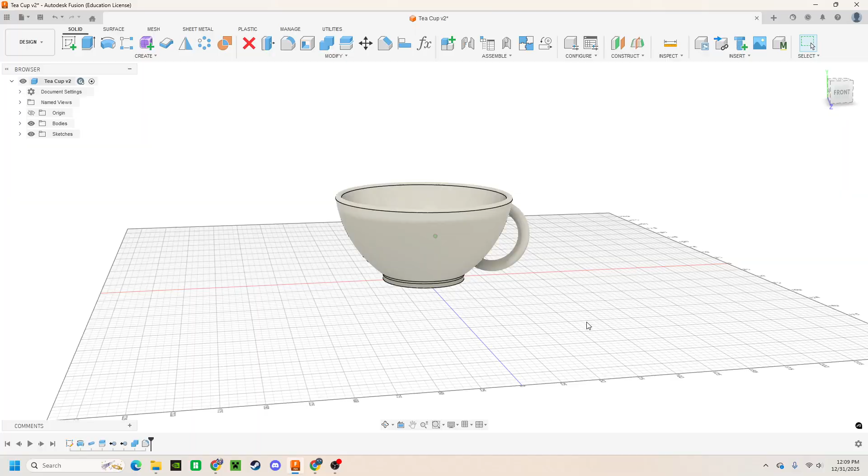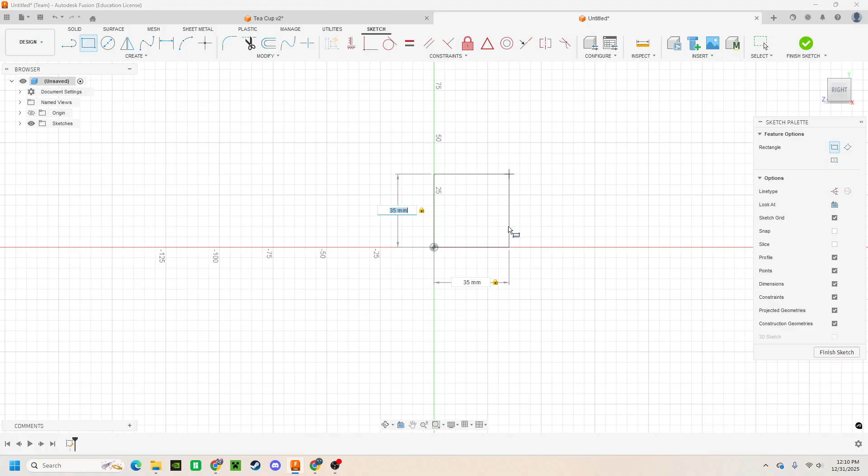Create a sketch on the side plane. Create a rectangle starting off at the origin that goes right 35 millimeters, and then the length or the height 5 millimeters.

From here, we're going to make two construction lines, one vertical from the origin that is 75 millimeters, and then from the top of this point, one horizontal that is 75 millimeters.

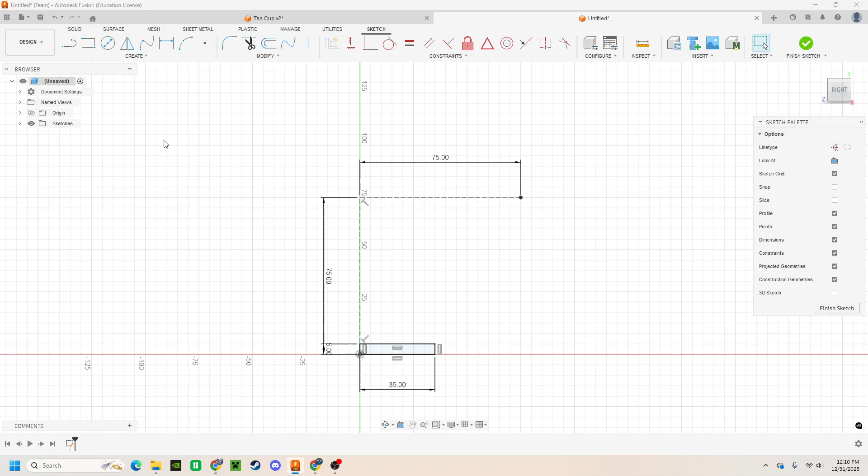Now, turn off the construction line. We are going to make an arc, so go to the Create tab, 3-point arc. Select this top right portion of this rectangle, and then this point on this construction line we just made, and then just press it. Now we're going to constrain this to be 100 millimeters.

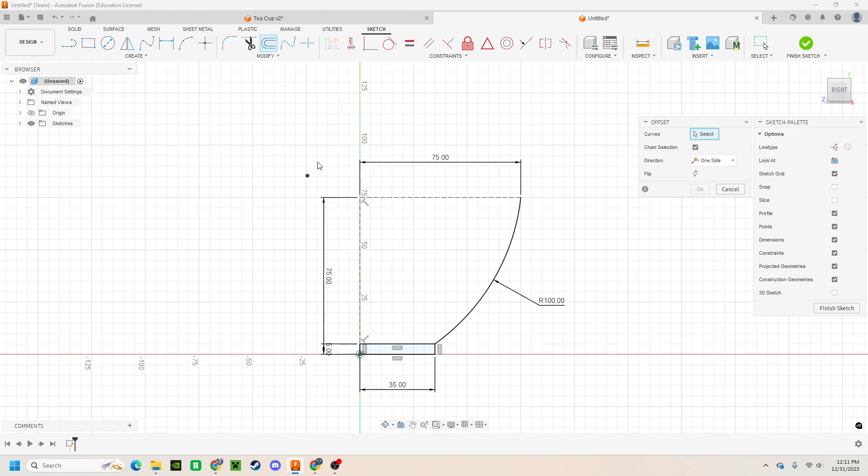So now we have this almost like teacup shape, but we of course need to have the inside. So we're going to use the offset tool. You're going to offset it inwards 5 millimeters.

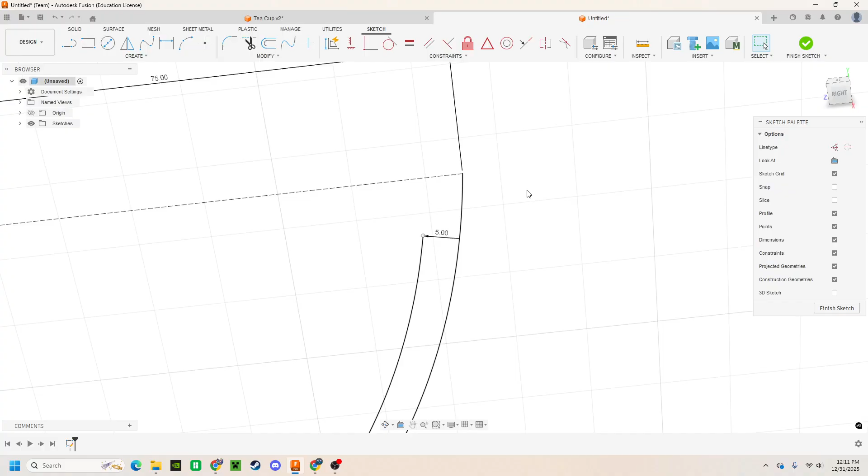Now, whenever you make an offset, the endpoints always get unassigned. So like where we can see this outer arc, the endpoint is assigned to this line. The offset that we make inside is not. So what you'll have to do is you'll have to drag it up to there, and then it will snap. And then do that to the bottom one as well. If it doesn't snap like this, it's not snapping to it.

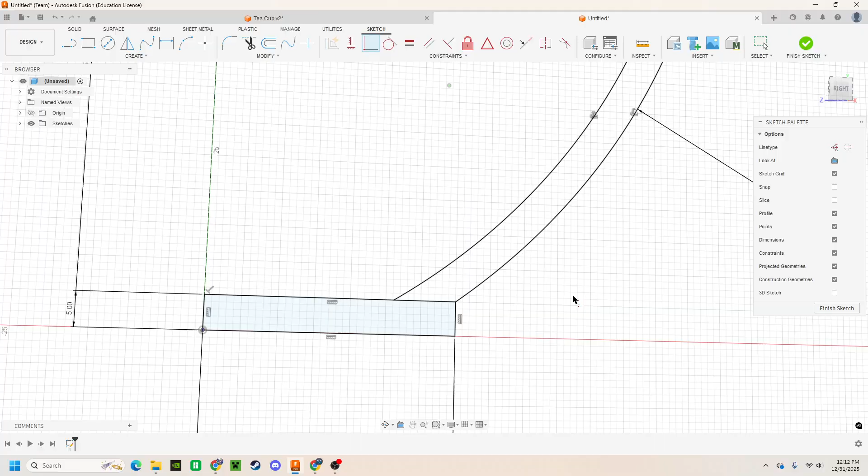You can go to the Constraints tab and press Coincident. Tap on this endpoint and then tap on the line. We're going to go into constraints later, but that's just a quick way to do this.

Now, because this top line up here is a construction line, this actually isn't a profile. So this part of the teacup that we made, it's not selectable like this bottom rectangle is. So what we have to do is create a line just between this point and this point, and then you see that makes a profile.

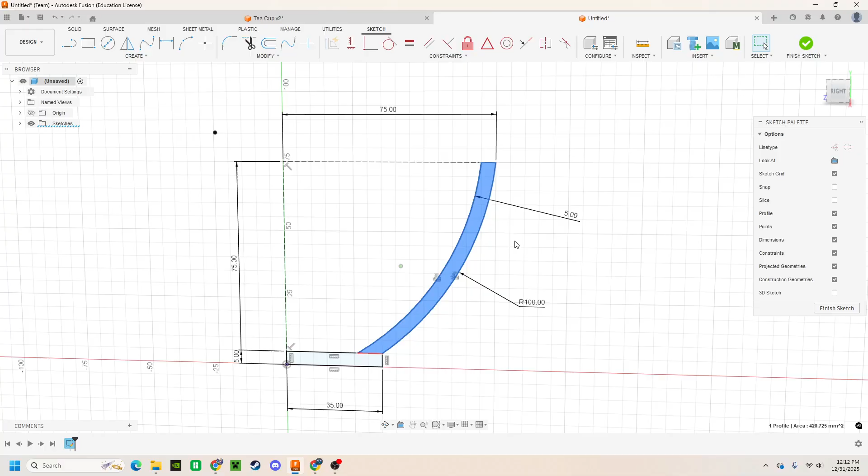Another thing that we're going to do is we want to make the handle for the teacup. So we're going to make a circle on the center point of this outer arc with a diameter of 55.

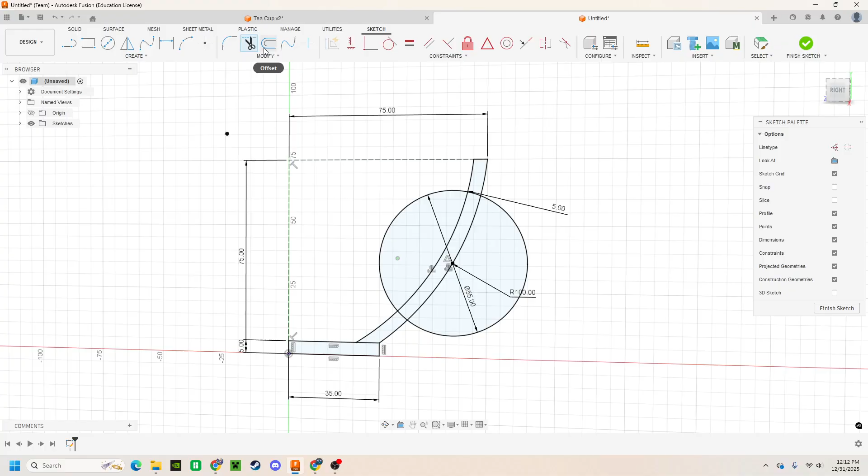Now, we don't actually want it to be a circle. So what we're going to do is we're going to do the trim feature within the Modify tab, and we're going to trim this inner edge. Once you have it like this, our sketch is done.

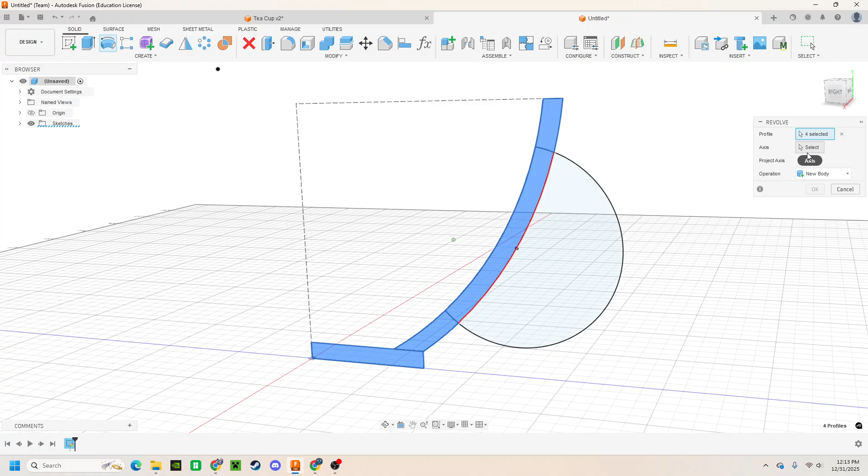Now you're going to go to the Revolve tool, click on Revolve, and you're going to click on these profiles. For the axis, we're going to click on this axis, and then we're going to do a full revolve. Make sure the angle is 360, and make sure the operation is new body.

Now that we have our basic teacup shape down, we're going to add the handle. Go back and make sure that that sketch is turned on.

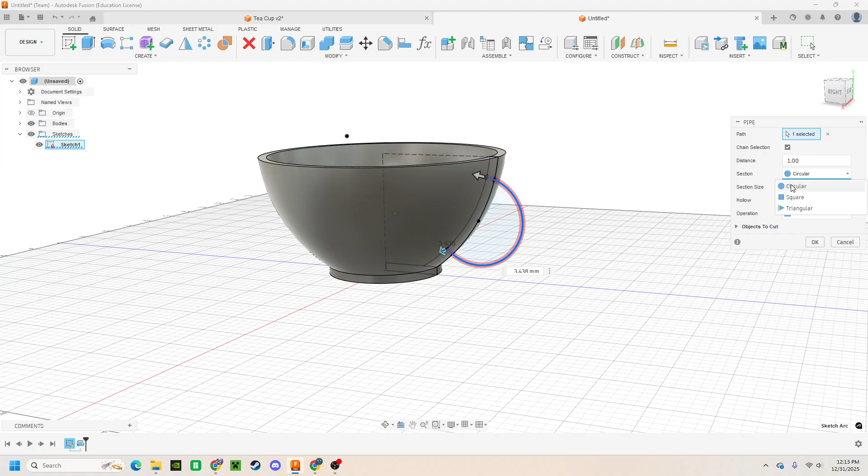Go to the Create tab, and then click on the Pipe tool. Pipe is basically just a sweep function, but with different preset cross sections. So we're gonna do the circular. For the section size, make it 10 millimeters, and then make sure the operation is new body.

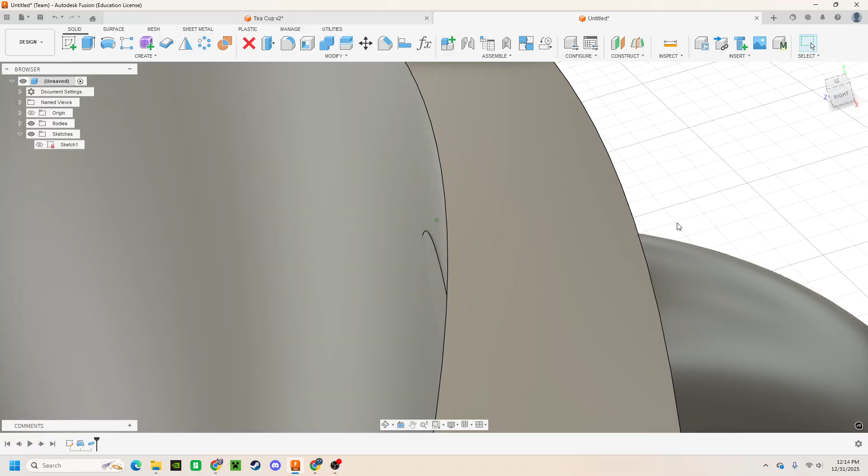Now, one thing that we can see is that when we use the pipe, it doesn't perfectly conform to the inner edge of the teacup, and you can identify that by seeing where it clips through. So because it's clipping through this inner edge, it's not good. You don't ever want to leave your models like this.

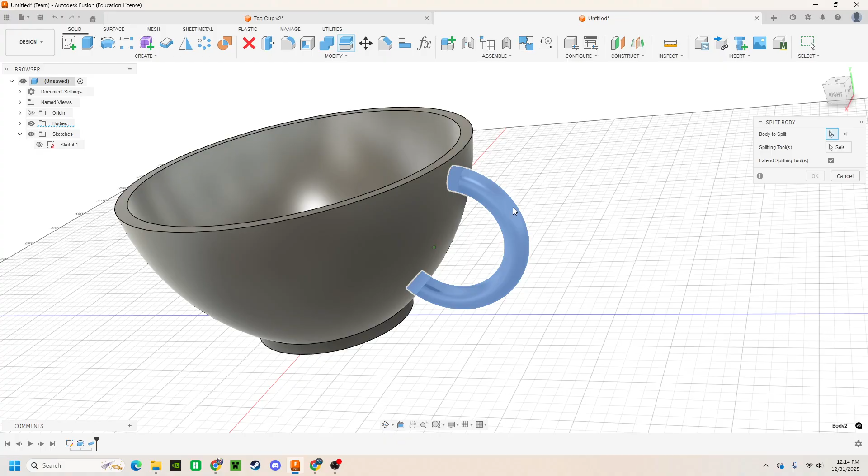So what we're going to do is we are going to use the split body tool. We're going to select the body that we just made, and we're going to select the outer edge as the split function, the split tools. Press OK. Now what that's going to do is that's going to make our handle into 3 different parts.

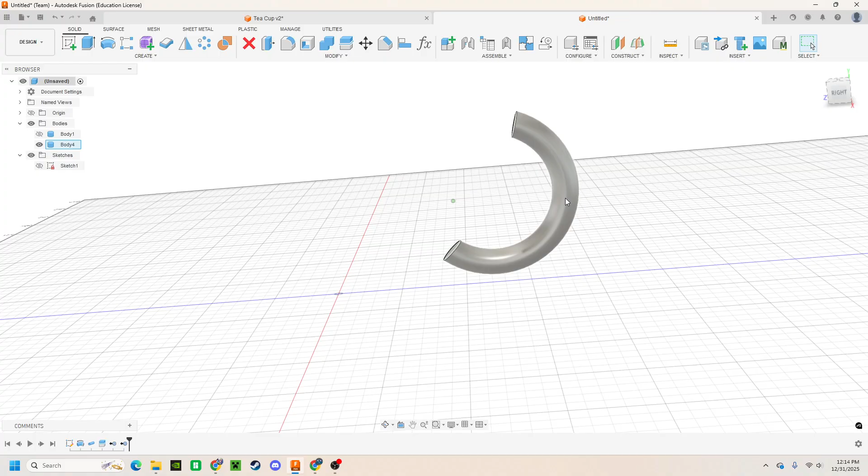We're going to press S and type in remove, and we're going to remove these two bodies. Now, our handle perfectly conforms to the outside of the teacup.

Then we're going to use the combine tool. Click this, and now our teacup is one full body.

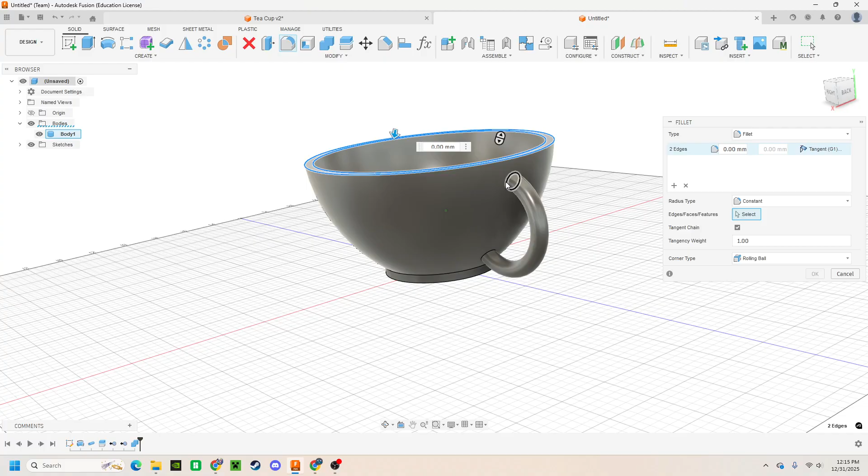But we're going to go in and we're going to round it off with a fillet. So we're going to select these edges, these outside edges, and if you want, you could select this bottom edge. I'm going to try 2.5.

That looks good. And now I'm going to apply an appearance. Press A. I like to use the default ABS plastic texture. It's a default white texture and can be modified easily. And now our teacup is done.

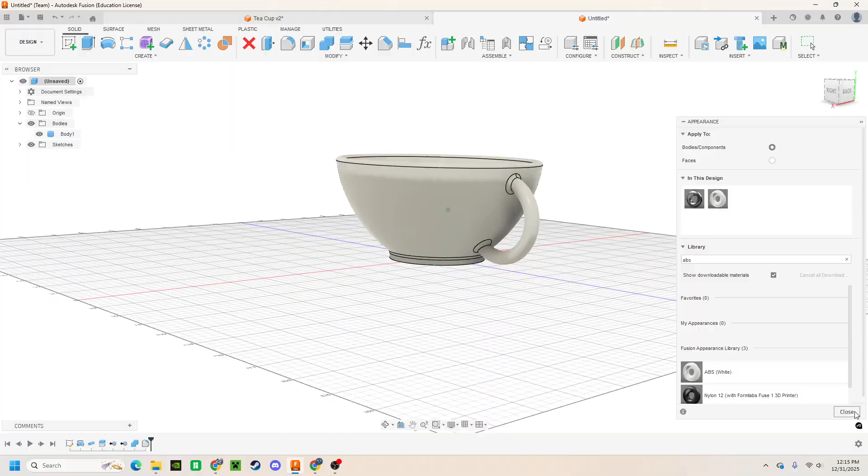One thing that I want you to do is try to model the actual teacup plate. And maybe you could also work with different designs. If you want to apply different textures within the appearance tab, you can. But that's pretty much it for today's project.